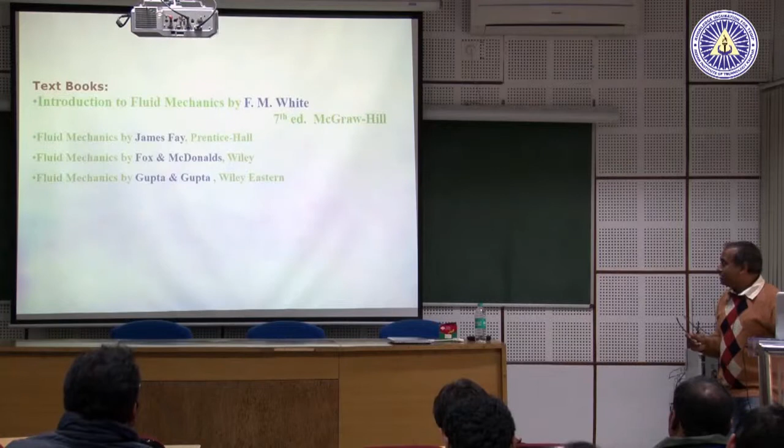Generally the textbooks I follow are the following. This textbook is probably the ideal undergraduate textbook. A similar textbook is this one, slightly advanced, slightly more precise in its brief writing. It is written by a mechanical engineering professor from MIT, Professor Fay, after his retirement, so with all his experience he has written it, and it is quite interesting. Many concepts become very clear when you read this book.

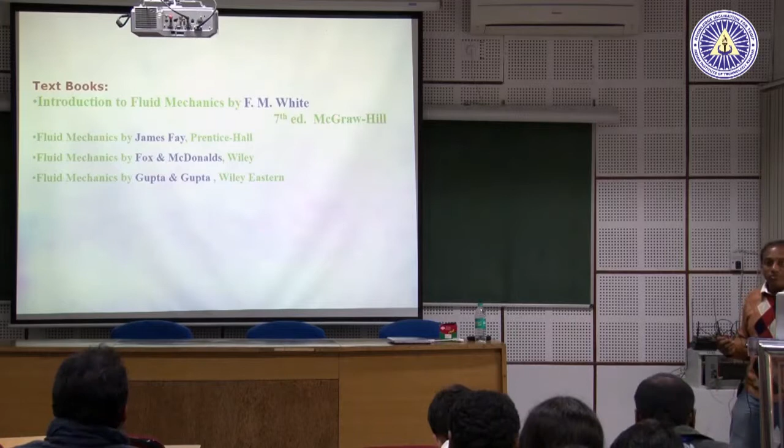And this is one of the books that many institutes use, which has a good collection of problems, but as far as theory is concerned, I think these other books are much more useful.

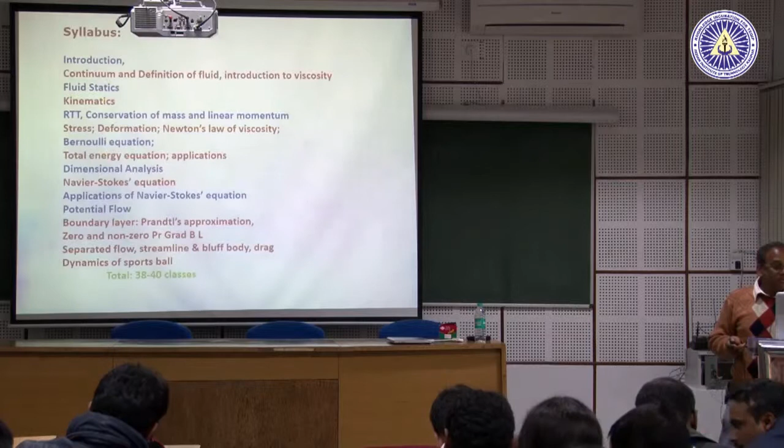So in undergraduate, we all know what we teach. I'll give you an example of when I have taught this course 4 times here in our big class at IIT Kanpur. We teach all branches, including computer science, electrical, or whatever branches we have. Some departments require students to compulsorily take this course, while others make it optional; they have some such compulsory courses.

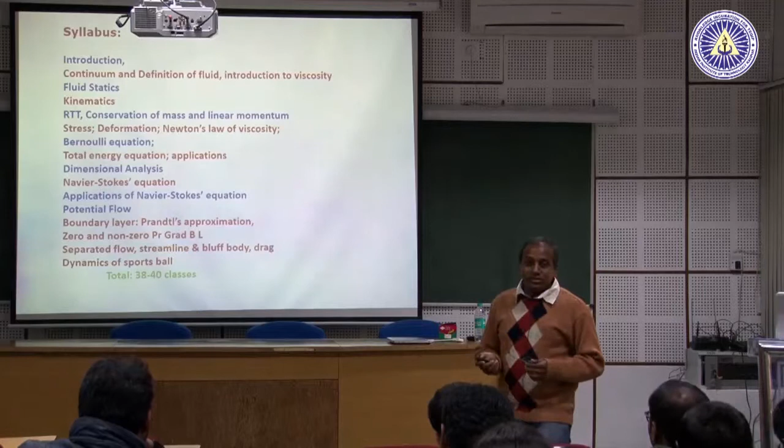That is the second year level course where we teach the following things. As a syllabus, we talk about the continuum, and then we define different properties. Then fluid statics, which is usually the first step in teaching fluid dynamics, and then we start from statics, then go to kinematics, and slowly go to dynamics.

So fluid statics, kinematics, then RTT, which is the Reynolds Transport Theorem, and conservation of mass, linear momentum, and when required, when talking about turbomachines, we also talk about angular momentum.

Then we derive the Navier-Stokes equation, but we also talk about Bernoulli's equation and the energy equation quite extensively in a UG course. We do not talk so much about the Navier-Stokes equation, but we do introduce it and do some exact solutions of the Navier-Stokes equation in this second year level course.

This is required because after that we look into the losses related to this energy equation when we see losses in pipe flows and long pipelines, and all the minor losses that you observe, which I will talk about a little bit.

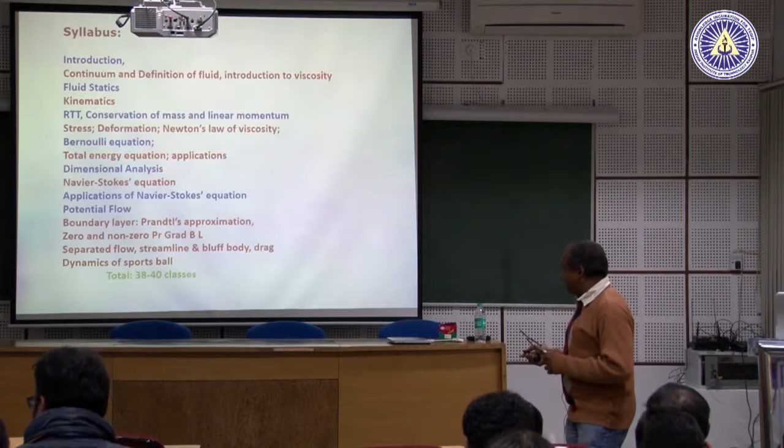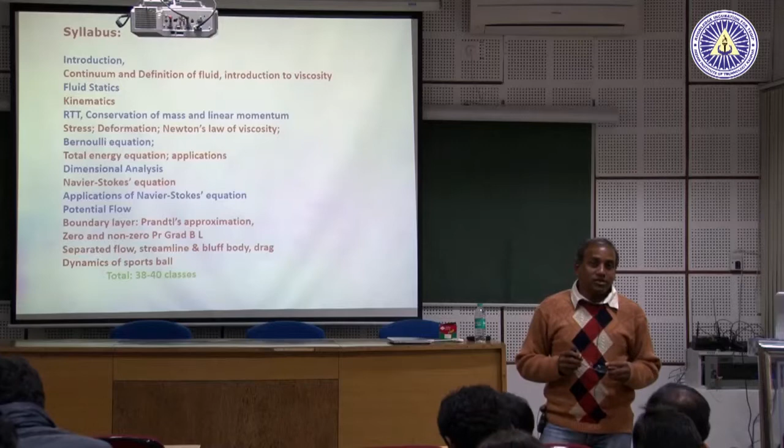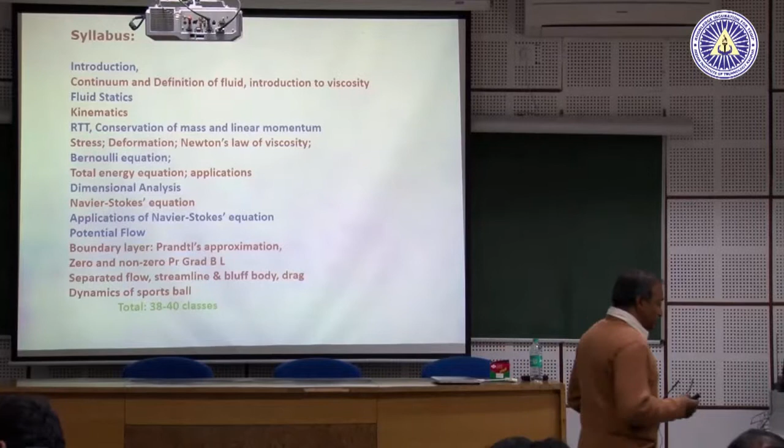Dimensional analysis is one of the important topics that we cover. Then we cover potential flow, and a little introduction to boundary layers at the second year level itself. This is usually what we cover, and to make it a little interesting, we talk about boundary layer separation and things like that, where just a qualitative knowledge is needed.

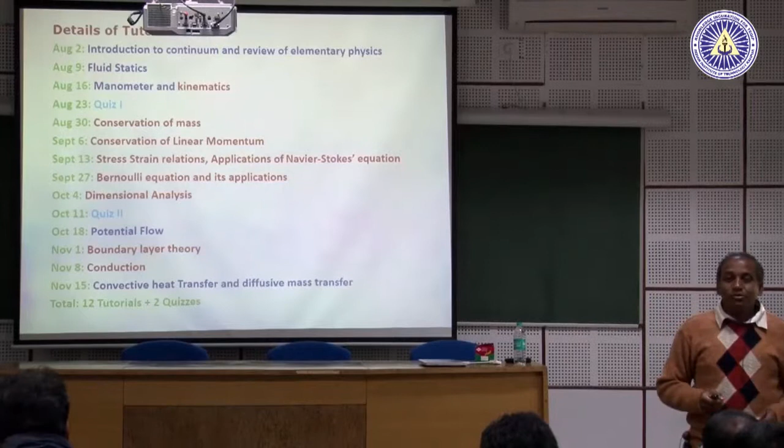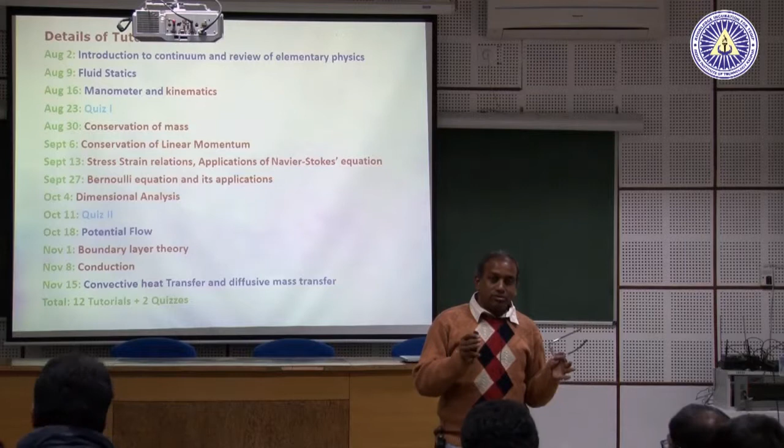Usually this course has a tutorial class, which is basically a problem solving class. Every week after teaching, I give students a set of problems on the topics we have covered. I am not sure whether you get TAs or not, but many times, because it is a very large class, it gets divided into tutorial sections of about 35-40 students. So out of 300 or 400 students, there will be about 10-12 tutorial groups, smaller classes that meet once a week for problem solving.

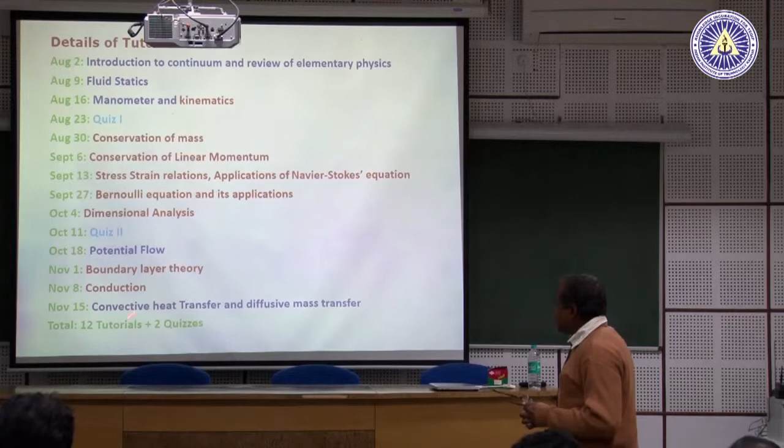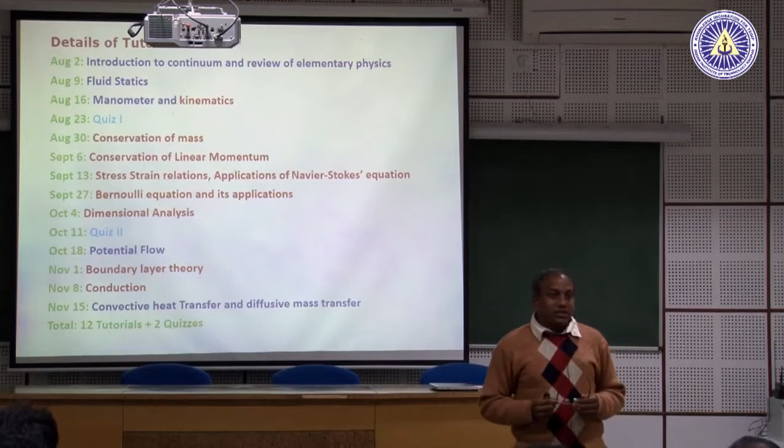So that problem solving sequence we have to decide. As an instructor, I have to plan which problem solving session happens each week. Back in 2012 or so when I taught this, at the very beginning itself I had to prepare all the problem solving assignments. Then the students would solve them and come discuss with the tutor. The tutor would be some other faculty member, or could even be a senior PhD student, and they would solve the problems in class and discuss them. This is how the problem solving part works as part of our tutorial system.

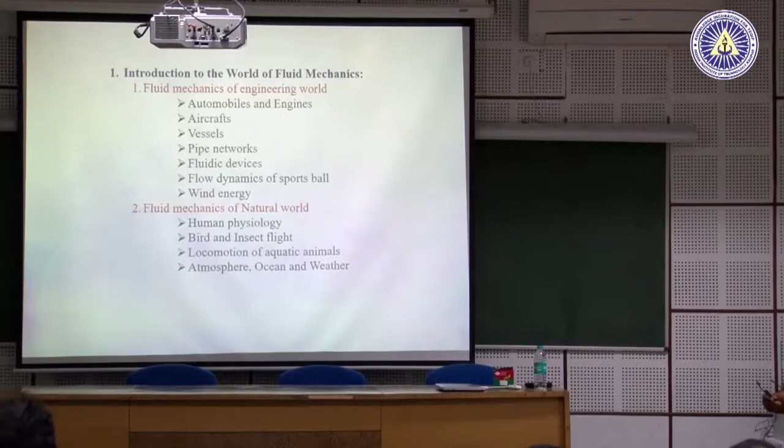Fluid mechanics is a subject that many students are afraid of, but when you make it interesting, many students want to pursue it. So as a teacher, our job is to motivate students and make the subject interesting. I will focus mostly on some salient features since it's not possible to cover all topics in this 40 minute lecture. I'll give some salient features of the course which I think are required, and if addressed properly, the students' doubts get cleared. But in the beginning I try to motivate the students.

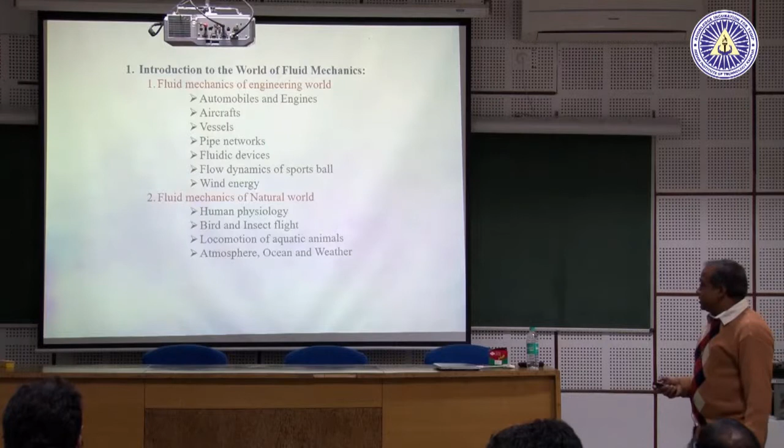To motivate students I talk about the applications of fluid mechanics in different fields, starting from automobile engines, aircraft, vessels, pipe networks, and fluidic devices. Sports balls are a very interesting topic where young kids get interested when you talk about how a cricket ball swings. You can also bring in biological examples, which I will show you.

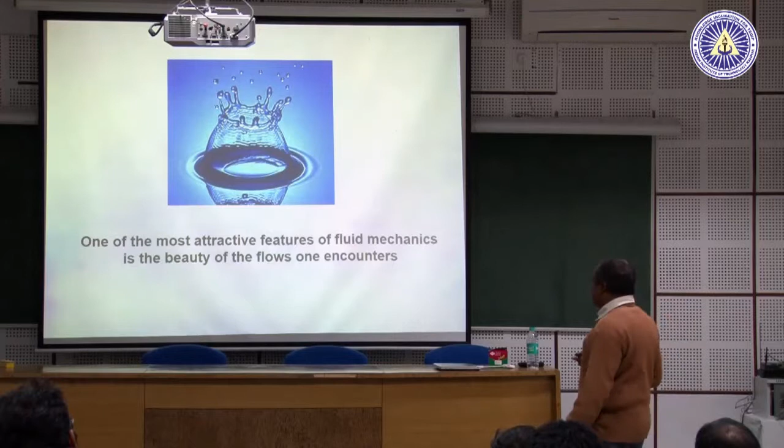Fluid mechanics is a subject where you can generate many attractive, spectacular pictures, whether through computation or experiment. These spectacular pictures create interest among students about why and how things happen.

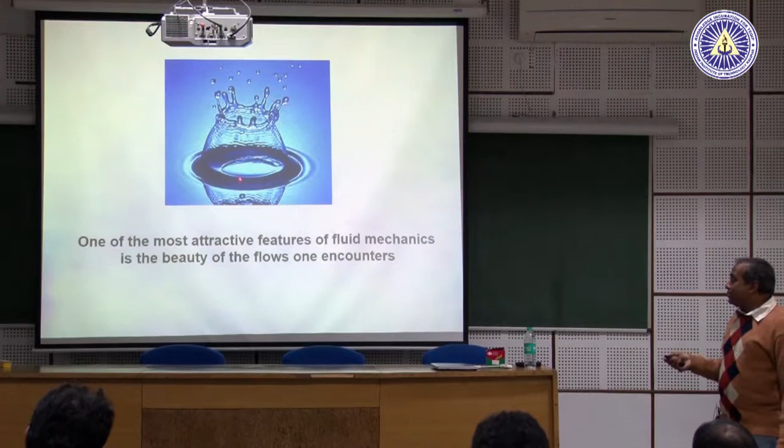For example, a raindrop falling into a lake, and how the liquid sheet rises up, why there are so many waves, and why there is a fingering phenomenon that eventually breaks into small spherical droplets. All these questions arise when you observe such spectacular things. Many such things can also be shown in fluid mechanics, similar to what computer science people do in visual simulations using fluid dynamics equations.

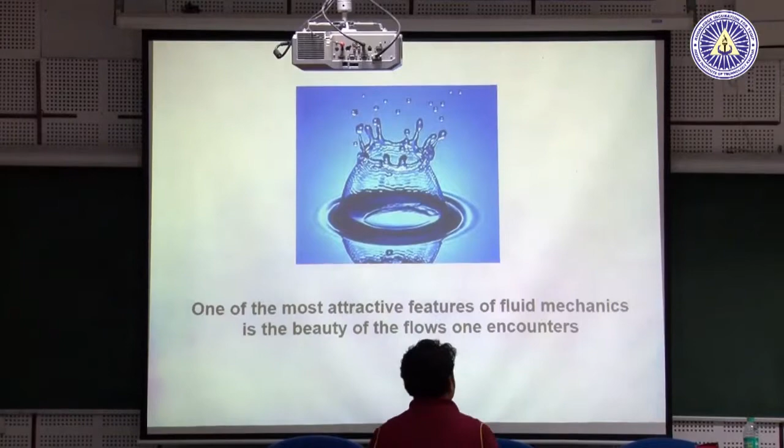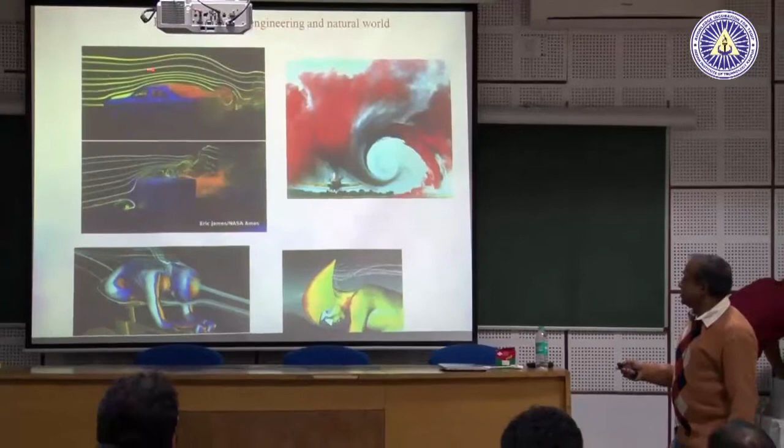So in the beginning when I start the class, my first class goes into this motivational aspect, where I bring different examples, such as a dye visualization of flow past a car.

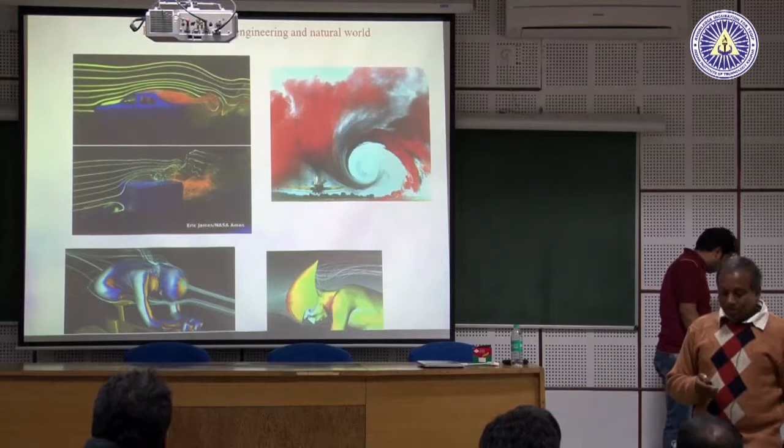Most of these pictures are taken from different sources, not all listed here, but anyone interested can get them from me. When I show this picture, students get an idea of how flow over a car looks. You can immediately show that there is a very nice attached flow over the car where the dye is not getting mixed, but in this other region it is getting mixed.

So this region of flow we can largely call laminar flow, whereas this other region is turbulent or transitional flow. If you look at a bluff body, a similar thing happens: you have a nice laminar flow, but then some transitional flow or vortex formation occurs.

If you see this particular picture, this is an aircraft when it moves, it is landing. At that time, near the wing tip, you see such a large recirculating flow generates. What is its implication?

It has an implication which actually enhances the drag, in the sense that you require more energy to drive, because this vortex is formed due to the motion of this wing, and this fluid has got some energy. Where from? It has some kinetic energy or rotational energy. Where did it get this energy? This energy must have been spent by the engine. So it actually results in some additional drag.

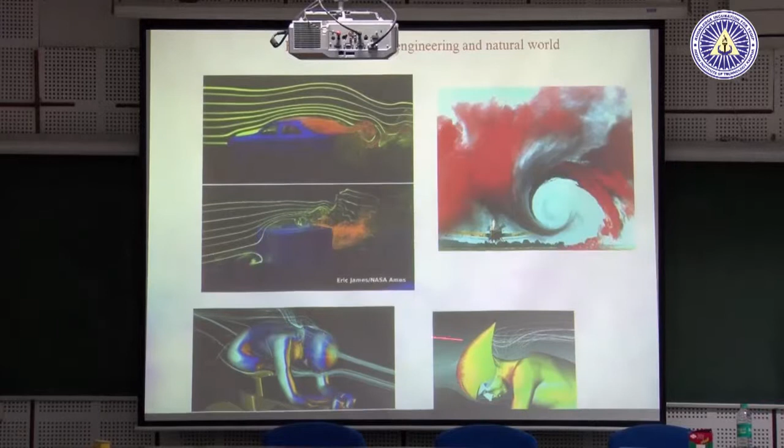So this is now a cycle. You can see the helmet position here and helmet position here. You can see that this helmet position will increase the drag, whereas this will not. So many times you will see that in cycling, when people do racing competitions, they keep their head like this, because there is less drag observed that way.

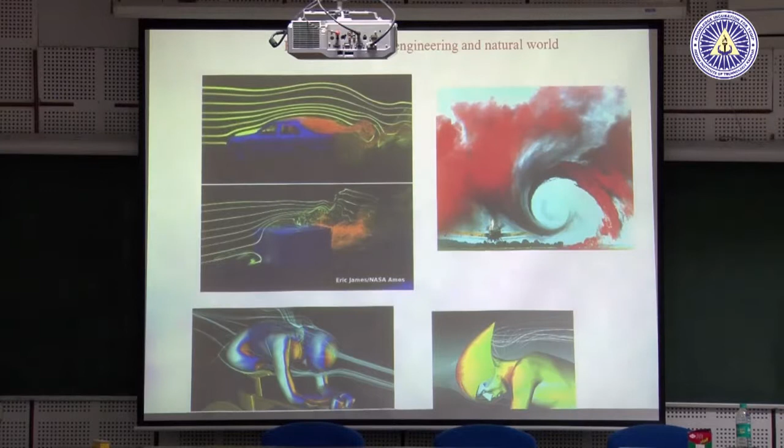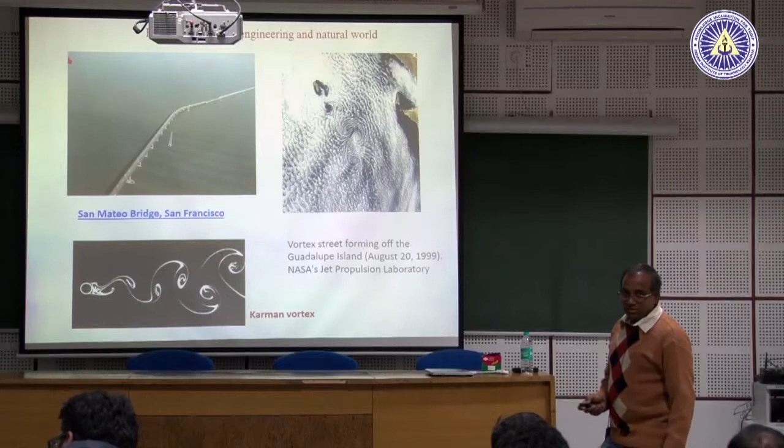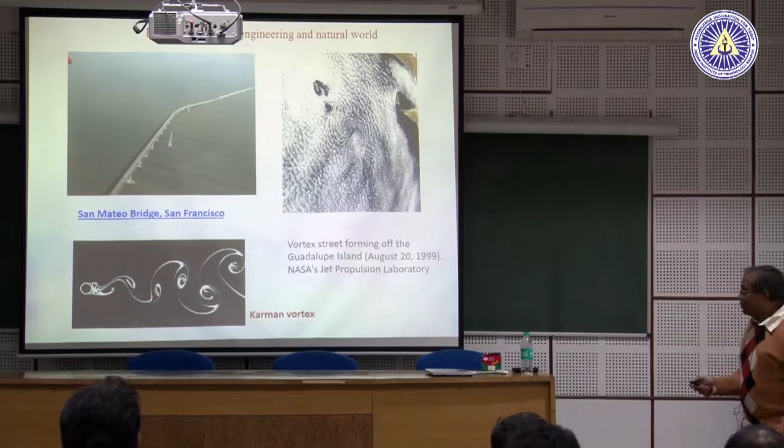This is called the Karman vortex street, which if you keep a circular object and pass the flow from left to right in this picture, then you will see this nice vortices forming, a nice structure forming, which you see in practice here also, which we generate nicely in the laboratory. Here also you will see this kind of thing.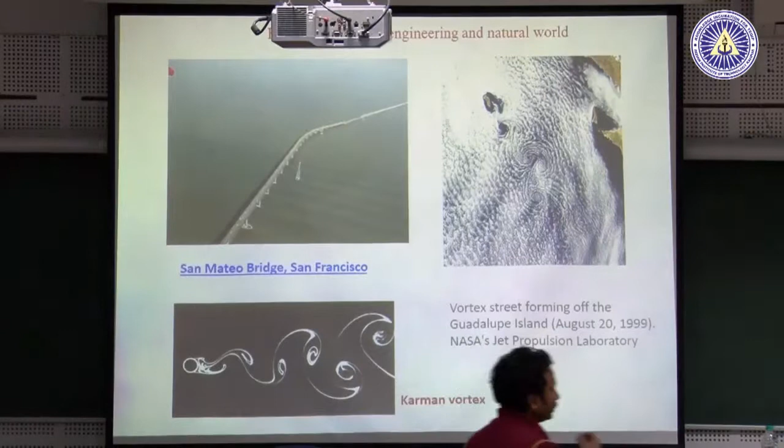You also see application of fluid mechanics from the heart, when we observe our circulatory system, flow in our circulatory system or flow in our respiratory system. It is entirely fluid mechanics.

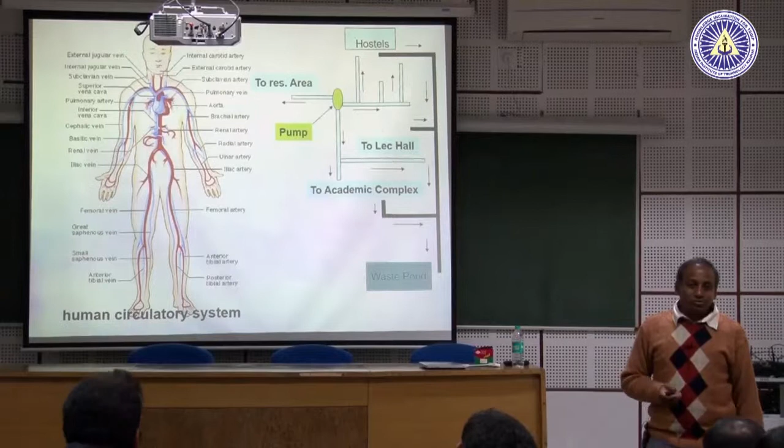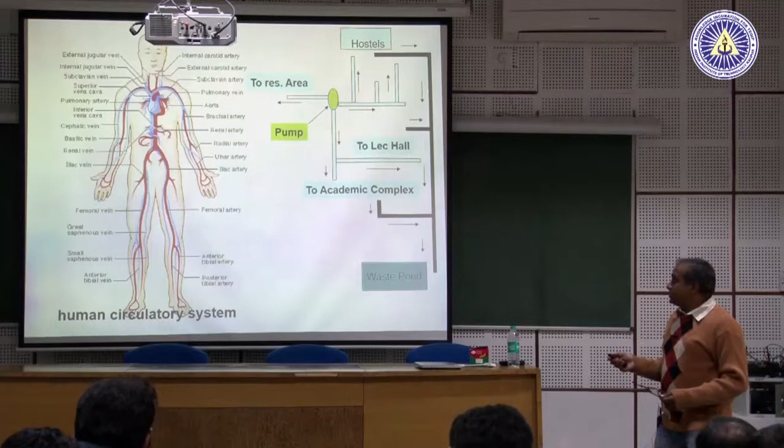And in most research you will see how the fluid is going out from the heart because of systole and diastole, the heart pumping. And then if there is a bifurcation, how cholesterol deposition and all these things happen there. All these modern studies going on involve fluid mechanics. Biology people will be very much involved in this kind of thing, but it's basically understanding fluid mechanics. This is a highly complex system, and we simplify it to look into the flow.

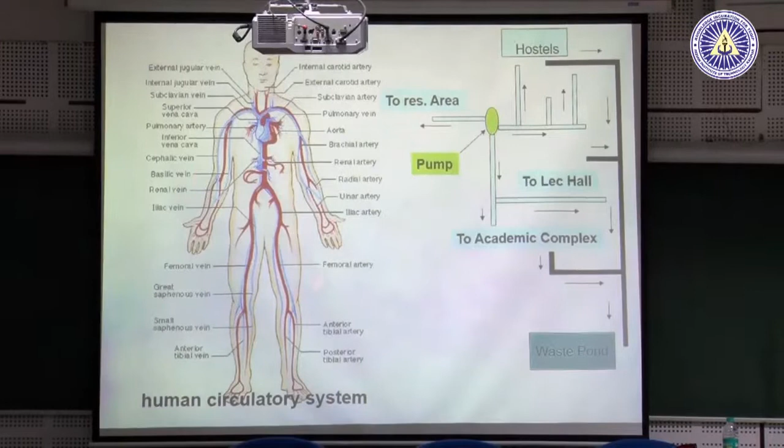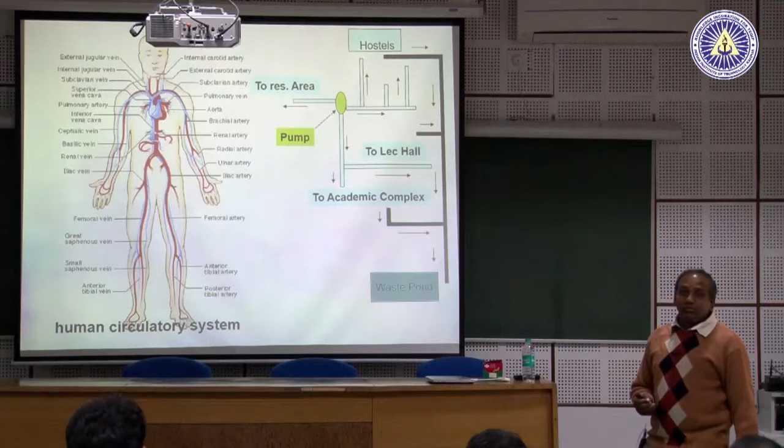Another natural system we observe can be linked with your piping system, where we pump and supply water to different places and take wastewater into the waste pond. It's probably the story of any campus, including our IIT. This system of flow through pipes, flow through pumps, flow coming through the drains, all of these are linked, and you can actually design these systems based on your knowledge, even very elementary knowledge, in fluid mechanics. It is not necessarily that you need more than that.

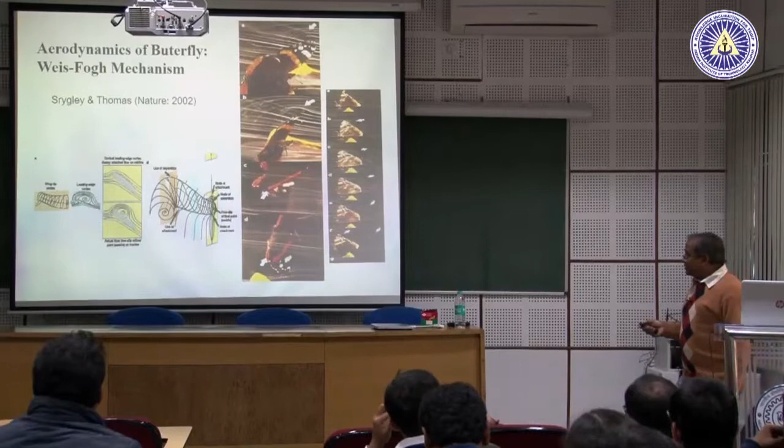This is one of the areas in which my research lies, other than those vortices I showed, where people tried to see how insects and birds fly. This is from early 2002; today we know much better, and a lot of work has gone on. You can see over this wing there is a wrapped-around vortex, and you can see this wake, this kind of circulatory flow.

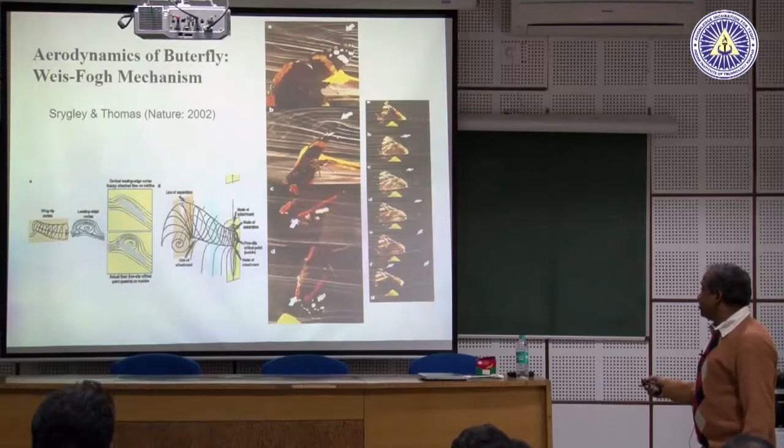This entire observation was published in Nature in 2002, and this experiment is quite interesting, so let me tell you a little bit about it. In a wind tunnel, they kept scented artificial flowers such that a real butterfly would fly from one to the other. Now, when a butterfly flies, you do not know whether it will fly from here to there or to this flower, and there is wind speed also. So at that time they tried to observe this flow, and they used 13 cameras to visualize it.

At that time, when they did this experiment, to cover a cricket match, Channel 9 used to use 9 cameras.

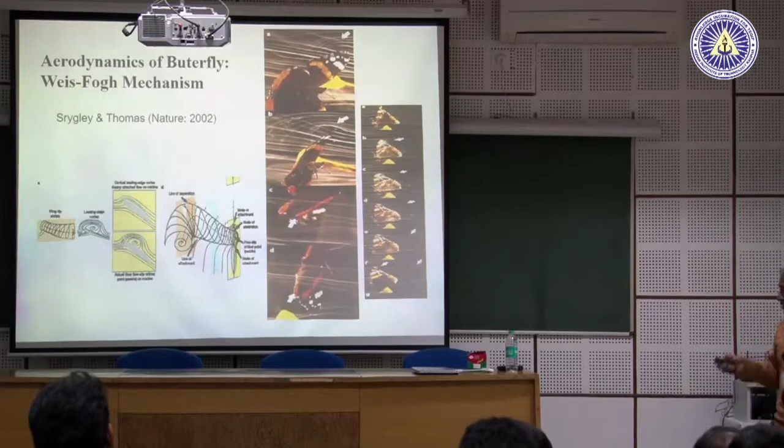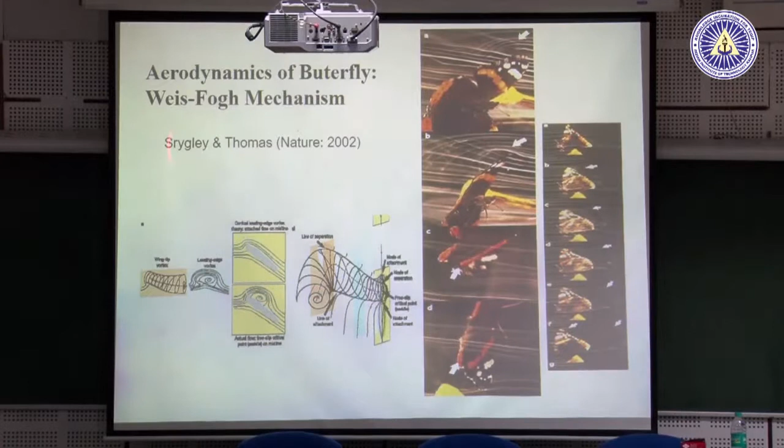At that time they used 13 cameras to visualize this and to construct how the flow field looks like around the butterfly wing. This shows which direction research goes, and also shows the application of fluid mechanics, even in the biological systems we observe.

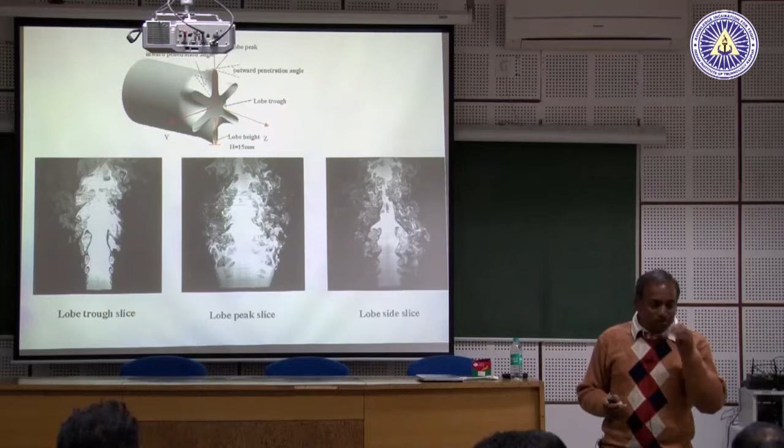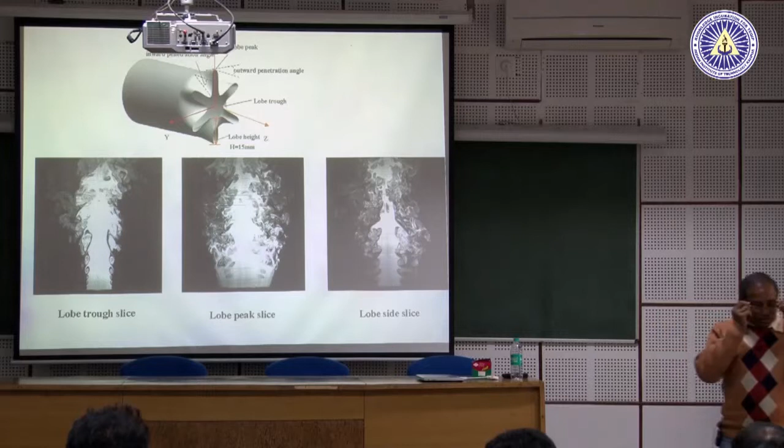You all see flow from a pipe, when it comes out, it comes out very nicely. But many engines have exhausts made with this kind of lobe nozzle. When you make it like this, it gets mixed very nicely, and from aircraft engines, when it comes out like that, there is a lot of mixing, so it will be less noise, and it will be less detectable by radar and all these things. This is how they mix the fluid like that.

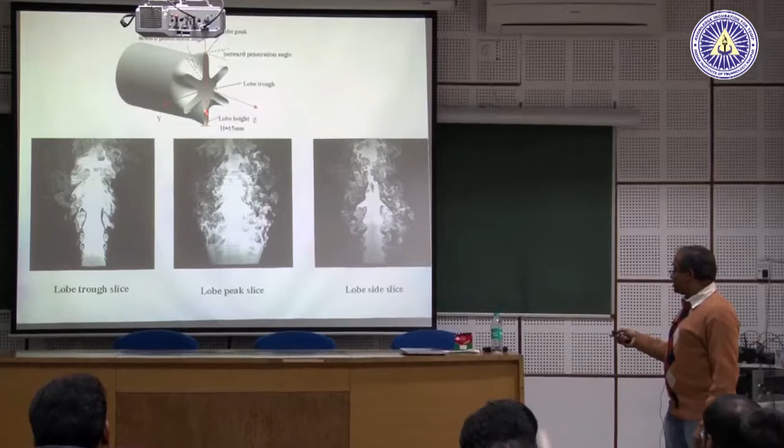If you look into the flow cross section, right now we are looking along the axis. If we make a cut in the xy plane, what you will be observing is something like this. At different locations you will see very nice patterns, which eventually get mixed up downstream. You can have many examples relevant to your area, and you can try to motivate the students how they should go ahead with this kind of flow.

Now I wanted to show you some motivational videos or educational videos, very short clips, so that some concept gets cleared. Unfortunately, my videos are not working here, so I have to go out and play them.

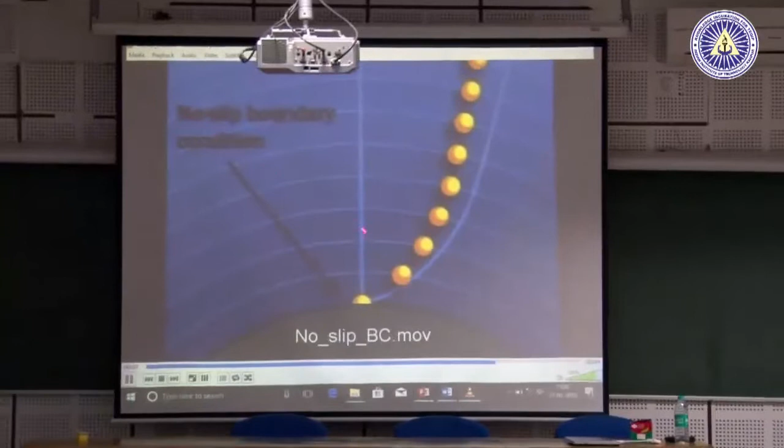This is a simple concept. We all know that when fluid flows over any surface, because of viscosity, there will be no slip at the boundary. So if you have to write an equation for the velocity at the boundary, the velocity at the boundary will be 0. This is just a demonstration of how the fluid particles will move. At the surface it will be stationary, and as it moves, the velocities are less here and more there, it is the effect of viscosity.

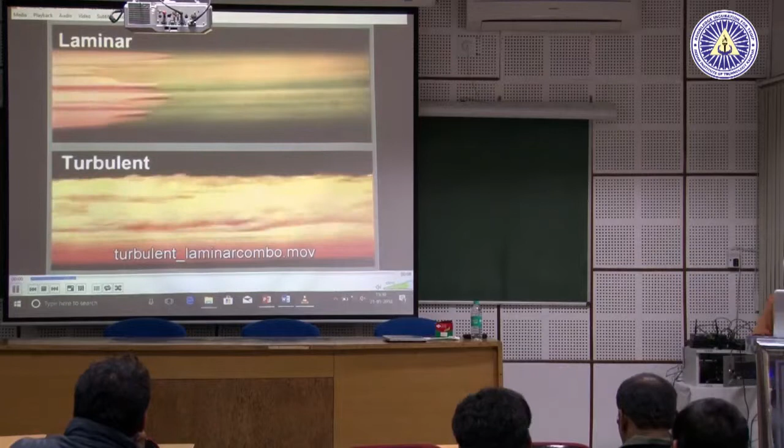Another example, we showed laminar and turbulent flow. If you have a laminar flow, this colored dye was moving very smoothly and nicely. If it is turbulent, it will be very random motion. This is how we introduce some of these concepts to the students.

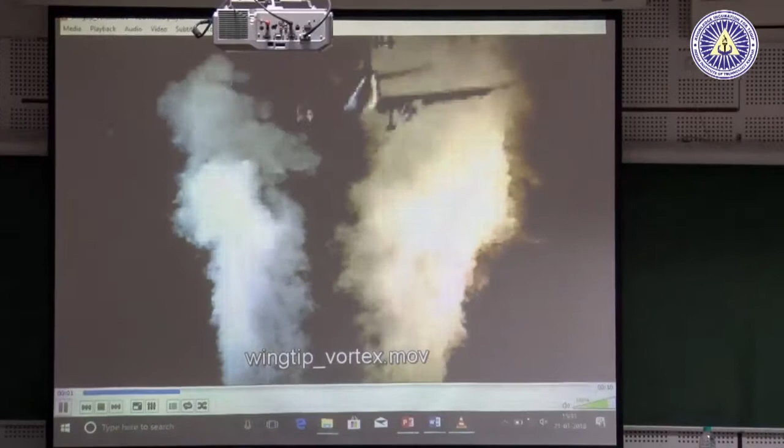Look at this picture carefully, that wingtip vortex I showed in the picture, this is the video of that. So when the aircraft moves, around this wing there will be a wingtip vortex forming, and you can see sometimes in very clear sky winter days, because of moisture condensation, those vortex lines become visible in some places when the aircraft moves. This kind of video is actually useful in terms of motivating the students about these things.

Sometimes you like to tell them a little story, and being in the aerospace department, I tell the story of the Wright brothers, and the story of the Wright brothers is, in very short brief...

If I try to tell the story of the Wright brothers - they had a cycle shop, and all the design work they did was in that cycle shop. You can see the region, their cycle shop or warehouse, where they were planning this design.

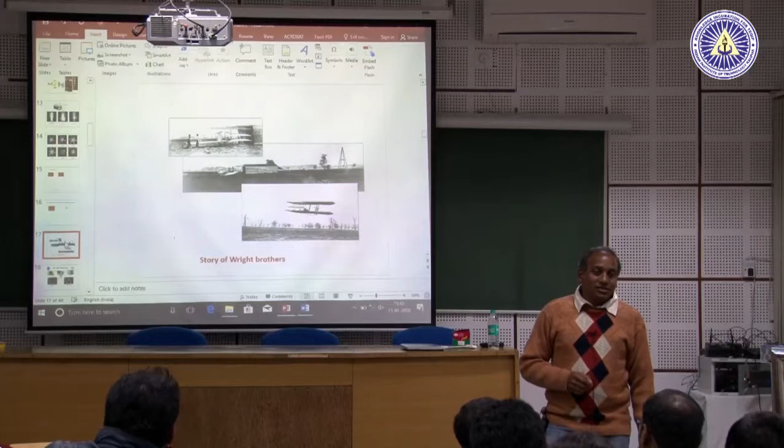So first they built a flyer - this is good - and on their first attempt they could not fly. That was in 1901 or thereabouts.

They made the design based on the best theories available at that time. You've all heard of NASA Langley - Langley was one of the scientists whose theory was well respected at that time, but most of these theories were empirical in nature. Langley and Lilienthal, a German engineer, their theories were respected most, and they built an aircraft based on that theory, but when they tried to fly, it did not fly.

What they realized was that the lift it produced was only one-third of what they estimated was needed to sustain flight, and they were so disappointed that they said in the next 1000 years nobody is going to fly. That was their statement after their first failure - yet the very next year, they flew.

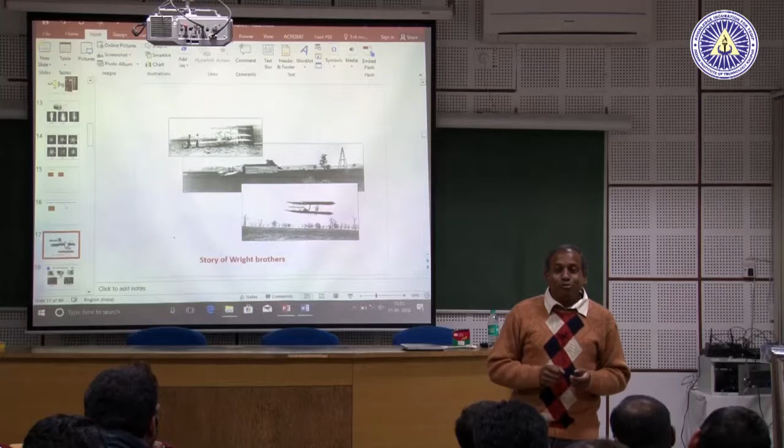What was it that they did that let them fly? They did not leave it there. They built the first wind tunnel at that time, a very small one about 16 feet long with a 1 foot cross section, driven by a fan with wind flowing through it. At that time they did not have any modern equipment to measure these things, and they probably did not have the means to make models so nicely, but they made several models.

In one year, how many models did they test? We all do small BTech projects where students make something and test it - but the Wright brothers, in one year, tested 50 to 200 models.

And how did they measure the forces? Using cycle spokes and such, it was like measuring weight - they placed weights in such a way that they could measure how much lift was generated and how much drag would be encountered.

What did they find in this one-year study? What they found is so simple you'll think 'oh, it's so simple' - but to discover it took this much effort. The wing they were using had too small an aspect ratio - that is, wing chord versus wingspan - and the theories were all 2-dimensional. They realized that if they increased the length, the edge effects would become less important compared to the rest of the wing generating lift according to 2-dimensional theory.

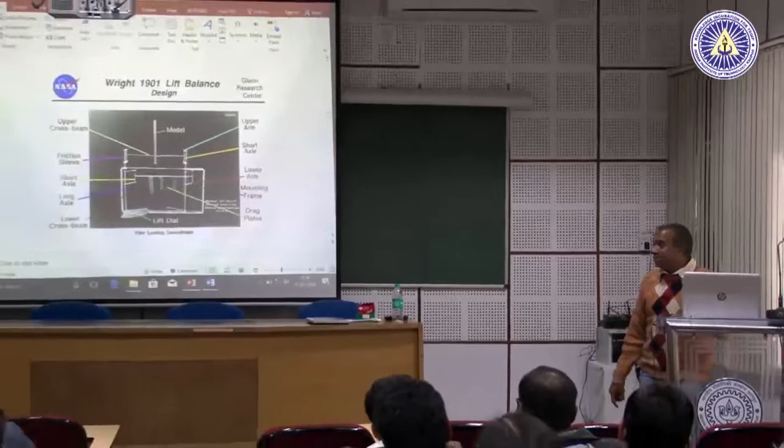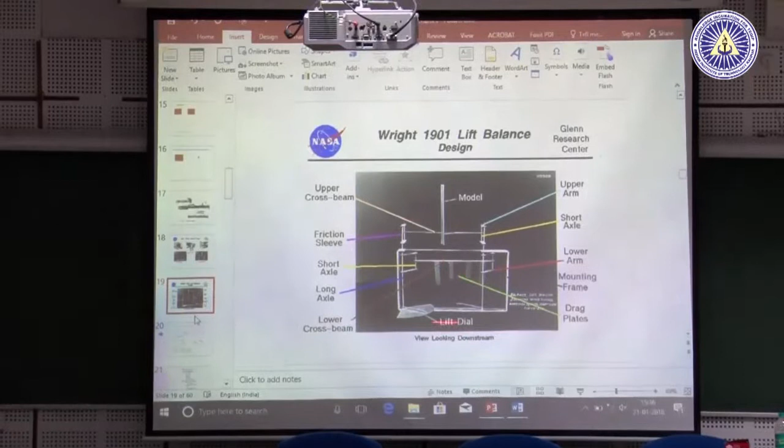So what they changed from their earlier design was to increase the wingspan. Once they figured out that aspect ratio, they flew the next year - yet just before figuring that out, the previous year, they had said nobody would fly for 1000 years. This is the device they used to measure the forces - they built their own balance, whereas today we use force transducers, strain gauge based transducers, and similar devices.

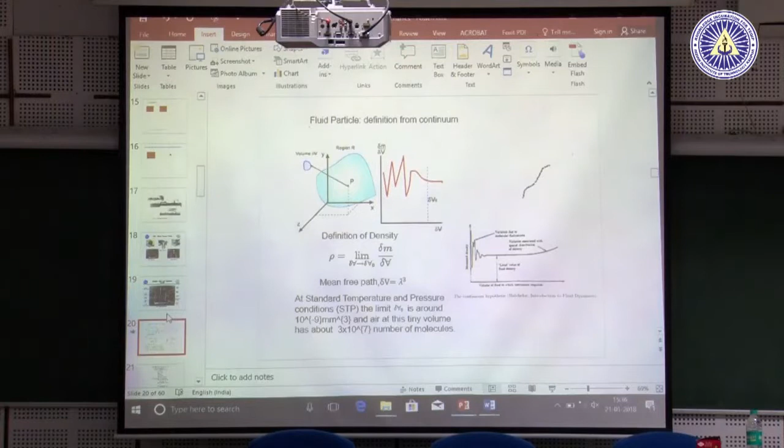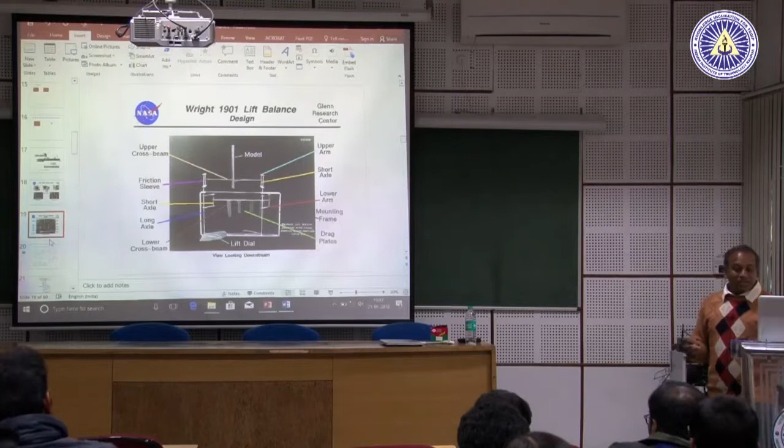Such stories can be told for many different fields - for biological studies, one can show the picture from Leonardo da Vinci, where he depicted the flow from the heart, how vortices form inside it, and how blood creates recirculating flow. He started this investigation long ago, but unfortunately these pictures only came to light 300 years after his death - they are only pictures because at that time we did not have the language to express them properly.

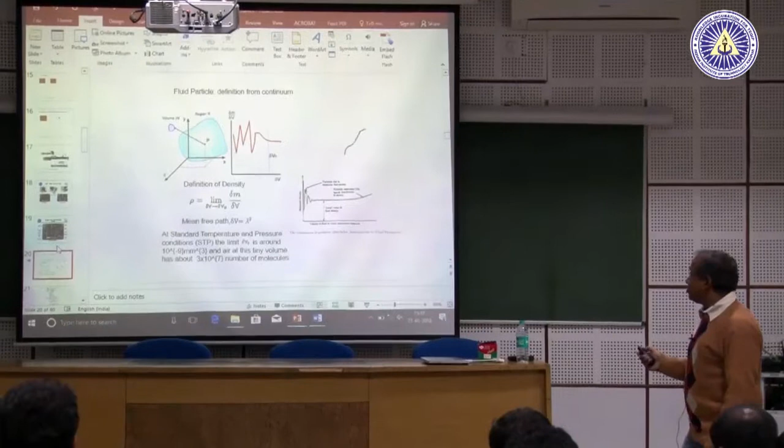So after this motivation, when we start the talk, we discuss the continuum, and the first question I ask the student is: what is a fluid particle?

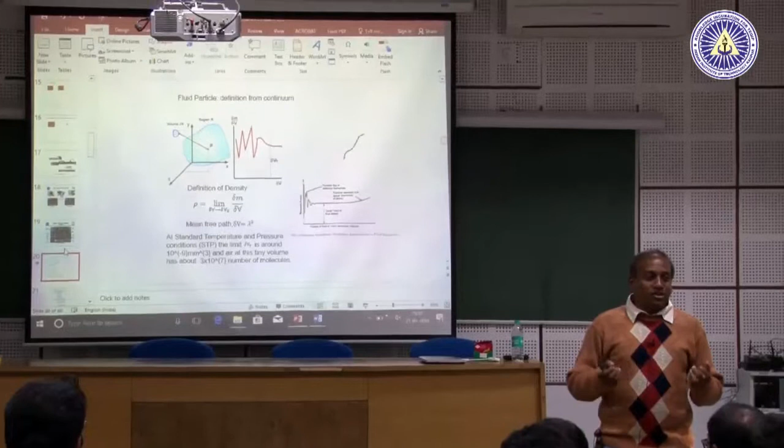How do we define a fluid particle? Another question we asked is the difference between fluid and solid. The fluid cannot resist shear force, so if you leave it, it will flow. Fluid will always flow if you are not restricting it.

But before that, I asked what is a fluid particle, and here your class 12 physics knowledge comes in handy. If I take a gas in a large or small volume, and look at it under a microscope, take a tiny volume and find how many molecules are inside. Density is defined as mass of those molecules divided by that volume. Mass per unit volume is density.

But if that volume under the microscope is too small, you may get sometimes this value, sometimes another, or any intermediate value, because the number of molecules coming into that small volume and the number going out need not be the same. So there is a critical volume such that the probability of molecules coming in and going out is the same. At that point we get a constant density.

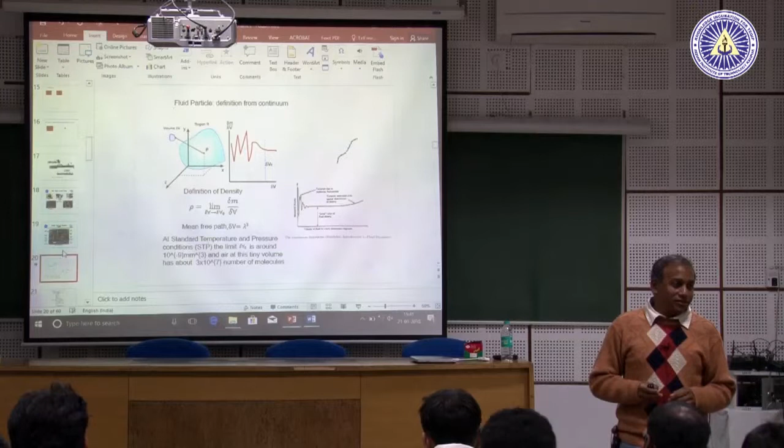Now why do we call this continuum? This volume is very small, so I can take such a volume and apply the properties of continuous functions — meaning all the differential relations can be applied. That is why differential calculus is so useful, and that is why we call this the continuum hypothesis.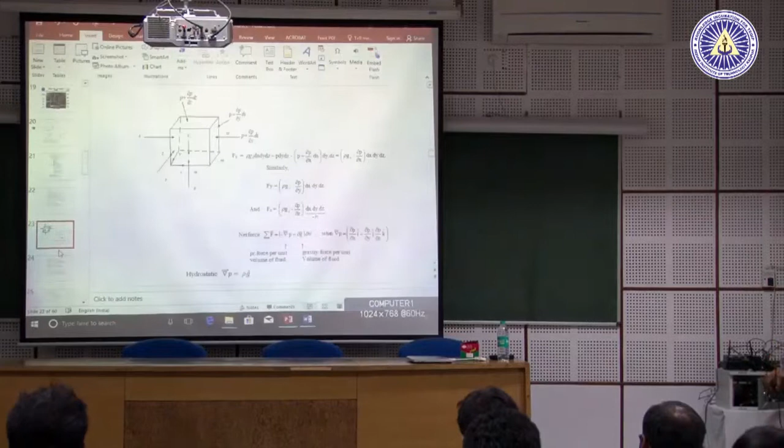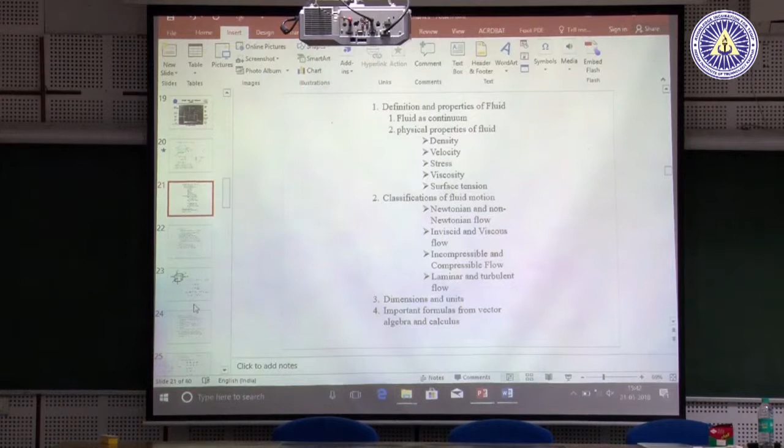Next we talk about all these properties, dimensions, and other things in a typical fluid dynamics course. I know it is really more involved just for these things. Then we move into fluid statics.

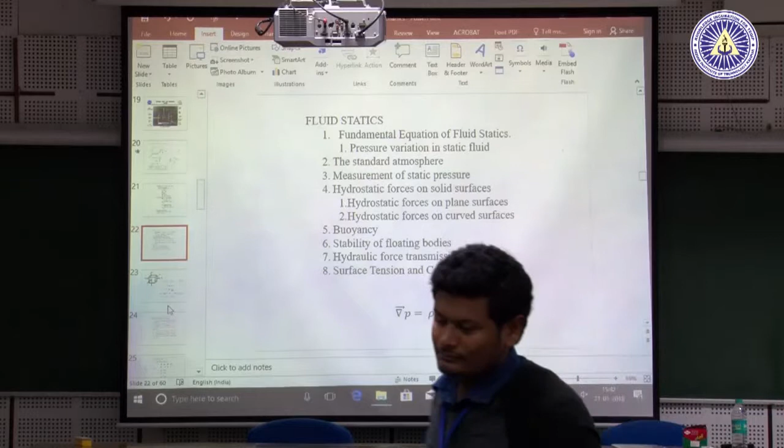Whenever we talk about fluid statics, what is the equation for hydrostatics? This is the equation I will write for hydrostatics. Many of you will say dp/dy equals rho g and similar expressions. But usually when I derive this...

3:45 is okay, usually when we derive this, we will be deriving in such a fashion, I just need 5 minutes. Such a fashion that you write it in the vector form, so that it is del p is equal to rho g.

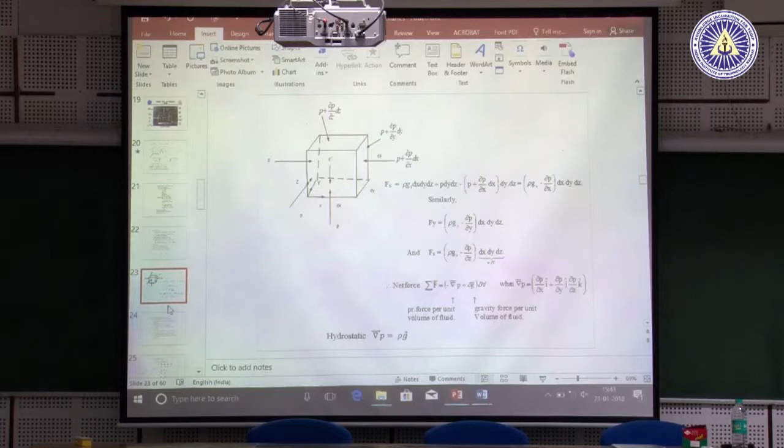Same way when we talk about fluid kinematics, this is another important thing where students get lost - what is material derivative, what is substantial derivative, and things like that. I do not know whether it is already taught here, but it is a very important concept, what is local derivative and what is material derivative.

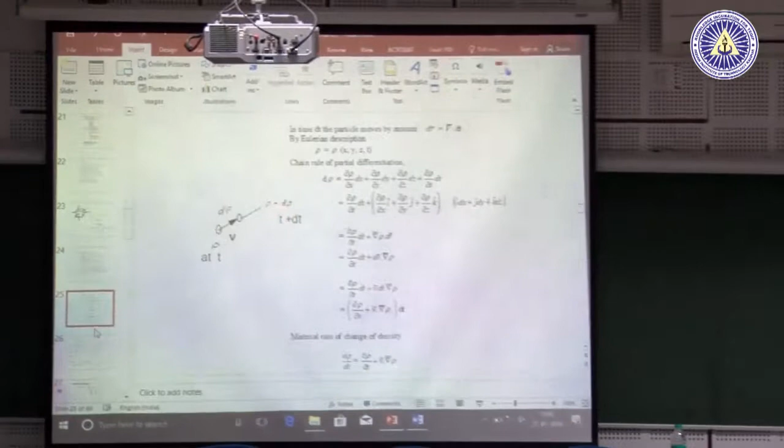Now, if you take a fluid particle as it moves, this is at time t, this is at time t plus delta t, this is rho plus d rho, and it has moved to dr distance. When you define rho as a function of x, y, z, t, all our undergraduate students, when they take fluid mechanics probably third year or so, they have done the chain rule of partial differentiation.

And you can write rho in this fashion, which we can write this term as del rho del t dt, and this term as the product of these two vectors, which is del rho dot dr. Dr is, if this is moving with velocity v, dr is v dt.

So you get this. So when you are defining rho in the Eulerian frame of reference - Eulerian and Lagrangian, those who are teaching all know - then actually the Lagrangian derivative is the local derivative plus the convective derivative. So when you are following the material particle, that is the derivative, but when you are defining at a fixed location, rho as a function of x, y, z and t, then this will be that derivative.

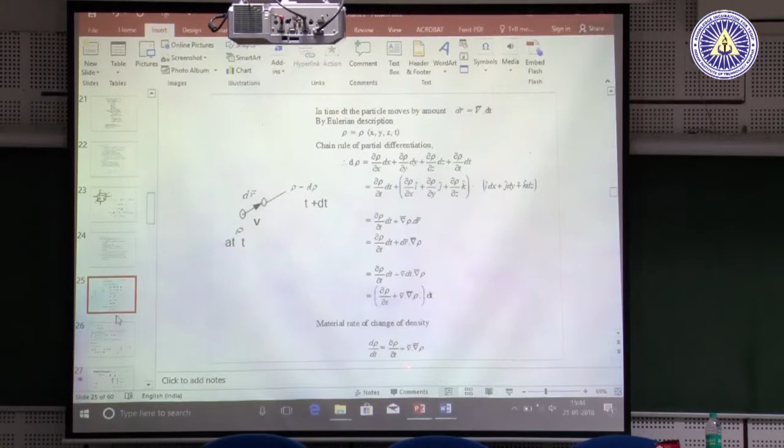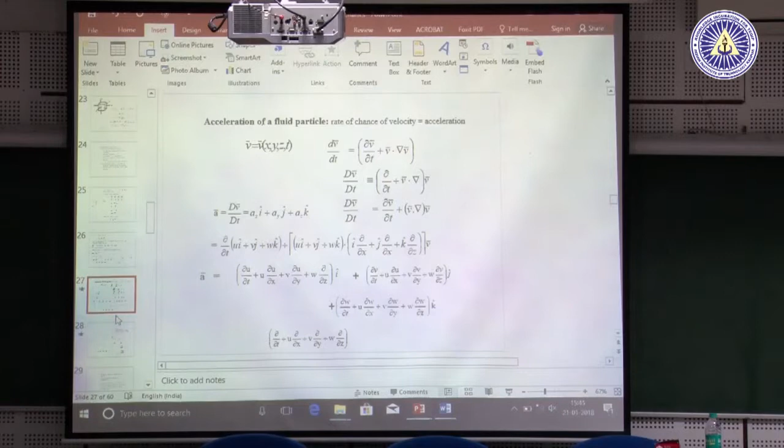Why is it required? Because when you do it for the velocity, replace rho by v, then you get acceleration, and when you apply Newton's law, mass into acceleration, that can come only when you are considering a fixed mass. So when you do it in Eulerian, you cannot see that fixed mass.

So this part should be made very clear, and one example that we do is like this: if you see through a converging nozzle, the velocity at any point will be constant. So that means del v del t is 0, but the acceleration is not 0. The fluid velocity is increasing, so acceleration is not 0.

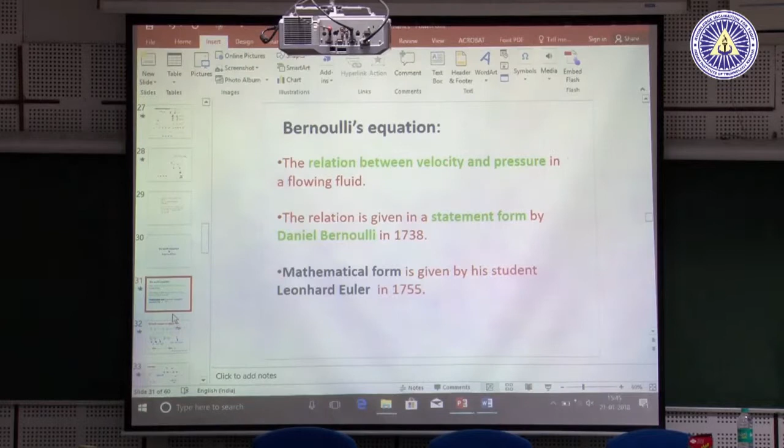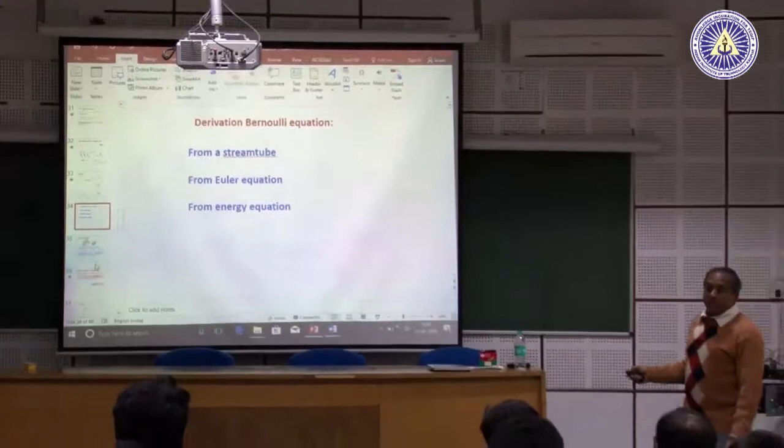So then we talk about the streamline, stream tube, path line. We talk about Bernoulli's equation, and this derivation you all should do in terms of 3 methods: stream tube, Euler equation and energy equation. You can do it from the Euler equation part, which is very nicely written in the textbook, and you can see that. Stream tube derivation is also quite interesting.

And then we talk about the Reynolds transport theorem, and then we talk about dimensional analysis. Because of the shortage of time, I cannot speak about everything.

And we talk about potential flow. One thing in potential flow that you must introduce is the flow between two plates or two lines, which usually is not talked about. So if there are two plates like this, how will the potential flow look like?

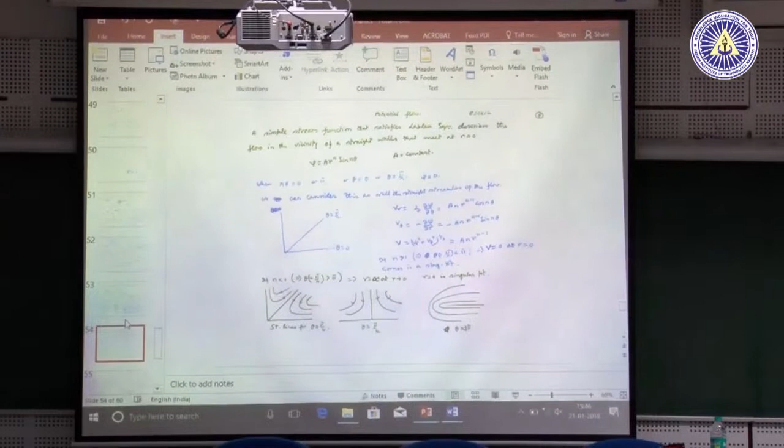Then we talk about the Navier-Stokes equation. This is my last slide.

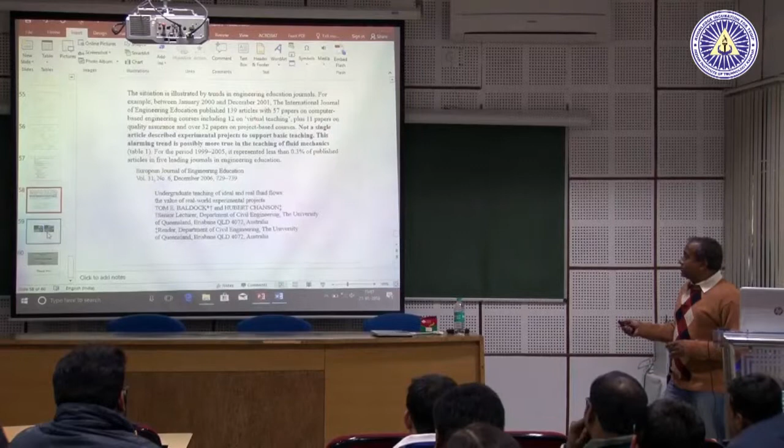If you see, most of this teaching, we are talking about using some video or some mathematical relations and things like that. Many of the students will not be motivated with that. And today a lot of students are coming into the universities, and to motivate them - if you see such education journals, not a single article describes experimental projects to support basic teaching.

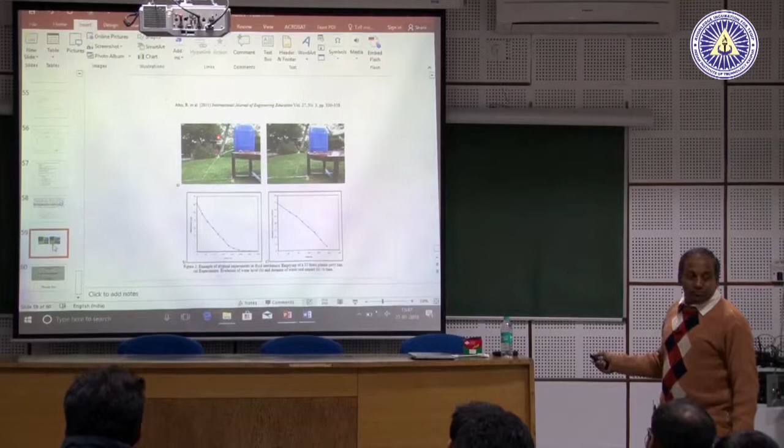And this is where actually I think the new generation of teaching will be coming - why can we do some simple experiments, like to show the Bernoulli's principle, how far it will go with the tank height, because this will depend on the velocity here. So how far it will go, you can actually note it down with a simple experiment like that, and you can explain the Bernoulli's principle.

Now this is where I have a small point. We are planning in TEQIP, as I talked with Professor Upadhyay, that we want to create such small modules, and those teachers who are interested to create them - we probably have some program, he will announce later, and then we will discuss that.

We want to create small modules, and it is not one person's job. So if some people come, some people are interested, we will create such small modules of different principles of fluid dynamics to demonstrate, which can be done in a tabletop kind of arrangement.

So we have to think, not in this way, because we cannot take 300 students there and demonstrate like this. It will be a classroom demonstration kind of module. That is what we think of. Thank you.